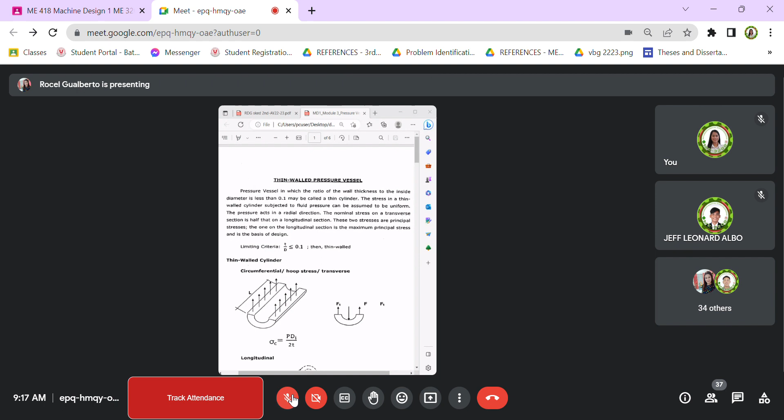Okay, so we have here the pressure vessel. The design of pressure vessel is dependent on what we call thin walled or thick walled. Okay na ba?

So, pag dinidesign po natin siya, we have to identify first whether the pressure vessel is thin-walled or thick-walled. To do that, we have what we call limiting criteria. The limiting criteria is the ratio between the thickness and the inside diameter. Again, take note that this is the inside diameter. So, T over D sub I. It should be less than or equal to 0.1 to be called a thin-walled vessel. Thin-walled po siya if it satisfies this requirement. Otherwise, if it exceeds 0.1, it is called a thick-walled vessel.

So when we say thin-walled or thick-walled, ano po ba yung difference ng dalawa? When it comes to the stress, the stress in a thin-walled cylinder subjected to a fluid pressure can be assumed to be uniform. Katulad po yung sa illustration natin dito. You have here the inner fiber, which is directly in contact with the pressurized fluid. And ito naman po yung outside surface natin, or outside wall, and ito naman yung inside wall. Kapag po yan ay thin walled, we assume that the stress on the inside wall and the outside are just the same, or they are uniform.

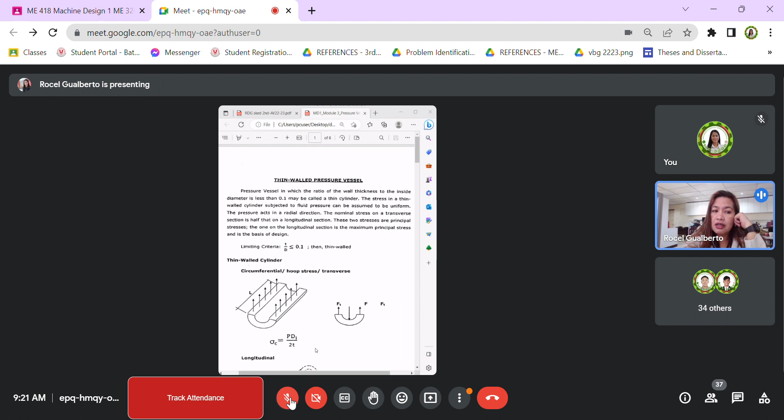So how do we decide for this thickness? If it is thin-walled, we have simply our induced stress. We have the two induced stresses known as the circumferential stress and the longitudinal stress. This is simply derived from force over area equal to the stress.

Okay, so for the circumferential, you come up with PD over 2T, and for the longitudinal, this is PD over 4T. I hope this has been derived to you in your classes in deformable or statics. Okay, so these two, the circumferential and longitudinal stress, these are both induced stresses.

Okay, circumferential stress is when you have here our cylinder and we cut it along its length. So you come up with this cross section of what we cut. Okay, and the stresses on these walls are defined by this equation, PD over 2T. P pertains to the pressure on the inside. We have DI, the inside diameter, and then T is the thickness of the plate to be used.

Whereas longitudinal, that is cut along the circumference of the cylinder. So when we cut it, this is the exposed area. So our stress along this area is measured using the equation PD divided by 4T, and you call it now the longitudinal stress. So, comparing these two, the equation is the same. Only the divisor is different. This is divided by 2 and this one is divided by 4.

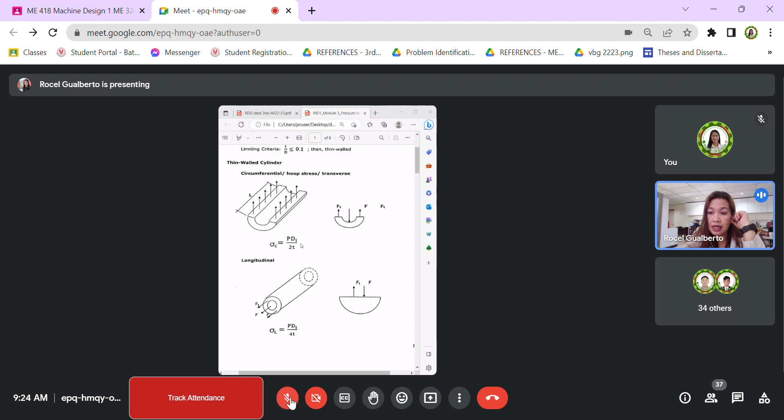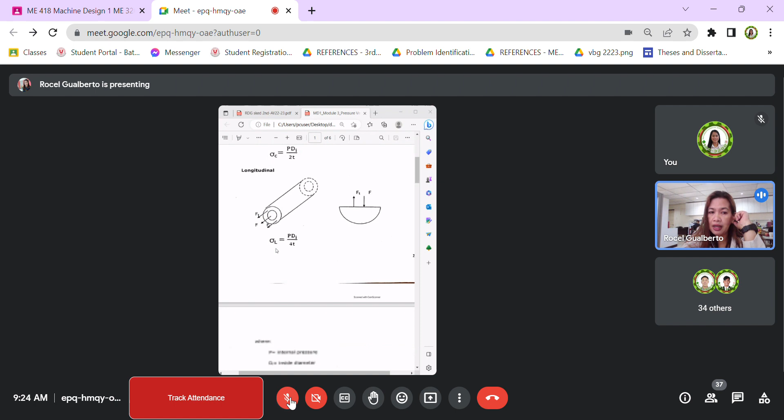So when our cylinder is cut like that, circumferential, PD over 2T. When along the length, PD over 4T. And which is the more critical stress? The bigger stress. So the circumferential is bigger, and this will be the basis of our design. And just like what we usually do, we simply equate the design stress with the induced stress of the material. So, for a good design, we equate sigma D with your circumferential stress. Again, we chose the circumferential stress because it is the bigger of the two induced stresses. So, this sigma sub C would be PD over 2T.

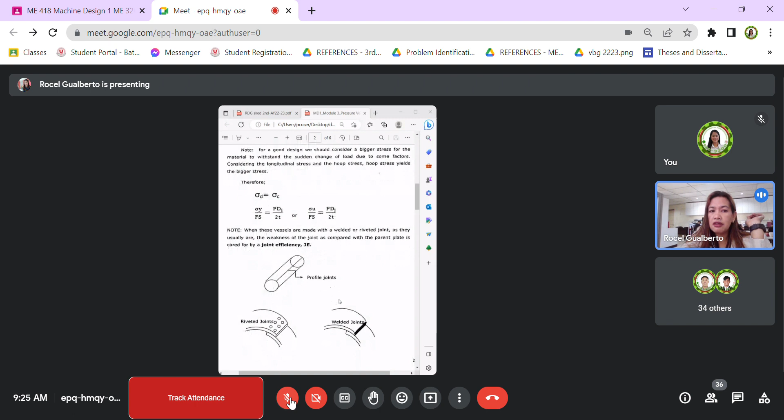Now, there are cases that you are given a joint efficiency. As I said earlier, it comes simply from a sheet of metal that we rolled and then joined. So this is the part where it was joined. So how do we join it? It's either by a rivet or through welding. When you say welding, we have there the filler metal, and we melt it to become a filler to join the two ends.

And the rivet is just like a screw, only it has no thread. So if we remove that rivet, the rivet is totally destroyed. Unlike a screw, where you simply need a screwdriver to detach it again, to disengage it, and then anytime we can attach it again. So, that is the only difference. But its appearance is almost the same. So, you join the ends using a rivet or through welding.

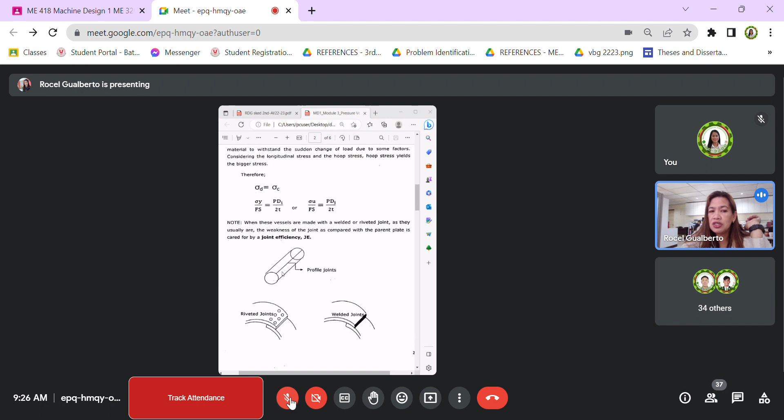So, with these joining methods, sometimes it is not 100% efficient. So the problem gives what we call the joint efficiency. If you are given a joint efficiency, you have to account for that in this equation. We include that efficiency in the equation. So, what do we do when there is a joint efficiency? Then our design stress should be lowered. You make use of a lower design strength to take care of the weakening of the joints. So instead of, as earlier, sigma D equal to your circumferential stress.

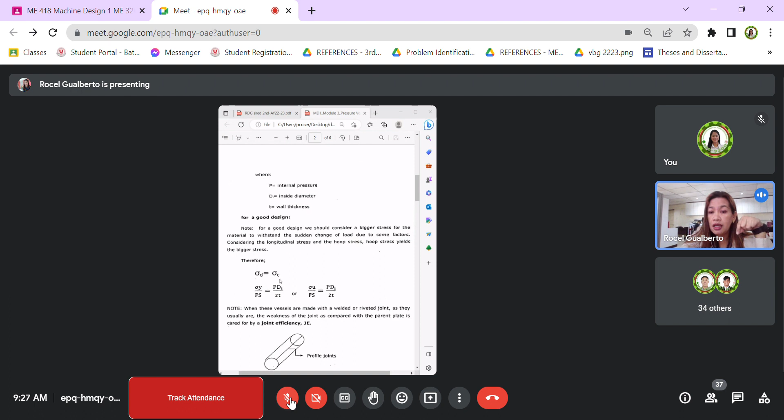We simply equate the design stress to the induced stress. So, dito, ganun din naman. Okay, lamang ang gagamitin natin is the lower design stress. Okay? So, yung lower design stress, yun po yung equate natin to the induced stress, which is the circumferential stress or the bigger stress. Okay?

Now, we lower the design stress again to take care of the weakening of the joints. So, dito po natin isasama yung joint efficiency. So, that would be the design stress and then you multiply that by JE. Halimbawa, if it is 90% efficient, so you use here 0.90. So it's the decimal equivalent. So in that way, you will be lowering your design stress.

So it's the usual design stress, sigma U over Fs or sigma Y over factor of safety. Okay? Ngayon lang, i-multiply po natin siya ng joint efficiency to lower the value. Okay? So, at ito po yung lower design stress, siya po yung equate natin to the induced stress, which is the circumferential stress, PD divided by 2t. Okay? So, from there, you can compute now for the corresponding thickness of the plate to be used.

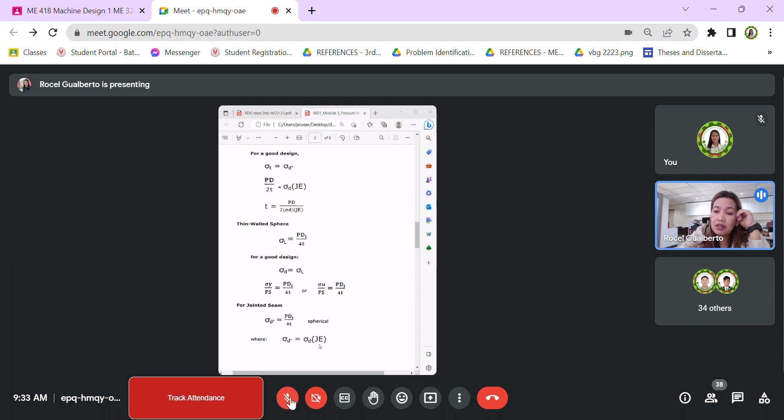Okay, question? Hello?

Okay. So, ganun po natin i-design kapag po ang member natin is thin-walled. Again, yung po procedure na minention ko, yun po ay para lang sa thin-walled. Either po siya ay cylindrical o kaya po ay spherical. So, sa induced stresses, pag siya po ay cylindrical, PD divided by 2T. Kapag po naman siya spherical, it should be PD divided by 4T. To be equated to your design stress, sigma D.

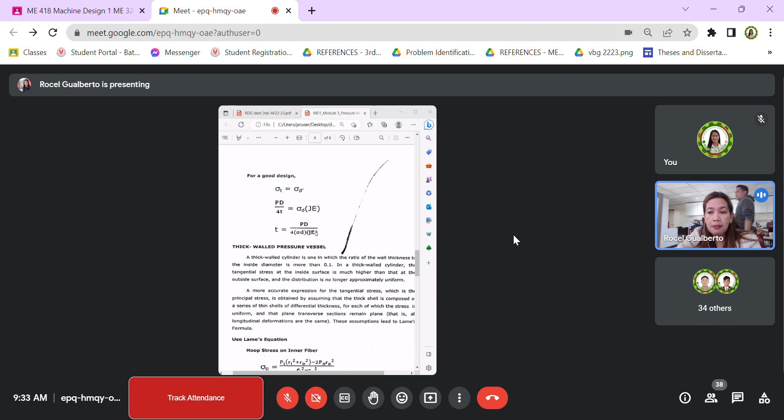And if there is a joint efficiency given, instead of sigma D, you use sigma D prime, the lower design stress. So, that would be our procedure para po doon sa unang klase, the thin wall. What about naman po if we see a thick wall vessel? When we say thick wall cylinder, the ratio of thickness over inside diameter is more than 0.1. And pag sinabi natin na thick wall, yung stress doon sa inner walls at doon sa outer walls, malaki yung difference. Higher po yung value doon sa in contact with the pressurized fluid, so it's on the inner walls.

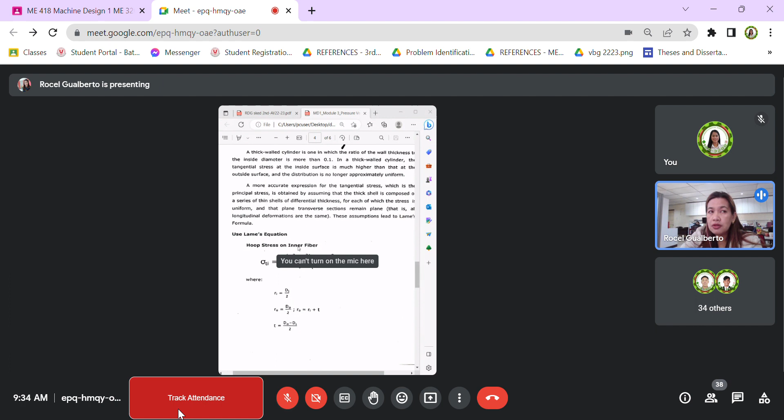Now, kapag po nakita natin na siya ay thick wall, we can no longer use po yung mga equations kanina. Instead, we will be using what we call Lame's formula or Lame's equation. The Lame's equation po is derived galing din sa thin wall. So, thick wall po siya, dinivide mo po siya ng maraming thin wall, and then you come up with this equation. So, if known to be a thick-walled cylinder, you will be using in your design the Lame's formula. We have here listed the three Lame's equations.

First is the hoop stress on the inner fiber, sigma T sub I. And then here naman po is the outside wall, the hoop stress on the outer fiber. And the last one is the longitudinal stress. Paki-correct lang po nito. There should be sigma and then subscript L. Yung una is sigma T sub I and this one is sigma T sub O, so correct po yun. Ang i-correct lang natin is sigma L.

Now, we look at each equation. Halimbawa po ito muna, hoop stress on inner fiber. What's in the equation? Pi is the inside pressure. The pressurized fluid inside, we assume it would be the same po doon sa wall. Ri is the inside radius; given the diameter, I simply divide that by 2 to obtain the radius. R sub O is the outside radius. And then you have Po, the outside pressure.

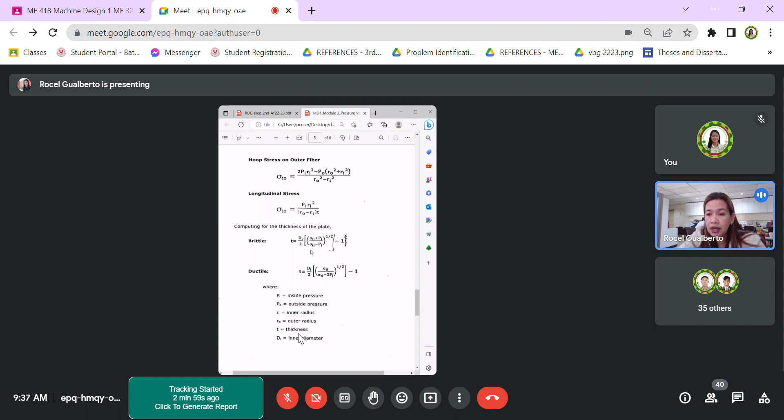Hello? Okay, now, dito, yung Lame's equation po yung gagamitin. Again, this is valid only for thick wall. And when we design, ano po ang ating i-design? We are looking for the dimension. Kapag pressure vessel, katulad po ng sinabi ko kanina, it is the thickness of the plate na ginamit mo, yun po yung ating hahanapin. So, what would be the thickness?

You see here two equations po for the thickness: one for a brittle material, and the other one for a ductile material. This is along with the Lame's equation. Pipili lang po with the given material kung aling equation yung gagamitin. And the equation involves Di, the inside diameter, which is usually given, sigma T sub I, and then Pi.

So, Pi is usually given, okay? That's the inside pressure. And yung sigma t sub i. So, ibig sabihin, before you can solve here for the thickness, necessary that you solve first for sigma t sub i. Okay, so, need muna po natin i-solve yung sigma t sub i. And where can you obtain the value of the sigma t sub i? Saan po natin makukuha yung equation? Ito po yung sigma t sub i. So meaning, you need to solve this first. Tsaka po natin isa-substitute dito sa equation. Okay? So, ano yung sigma t sub i?

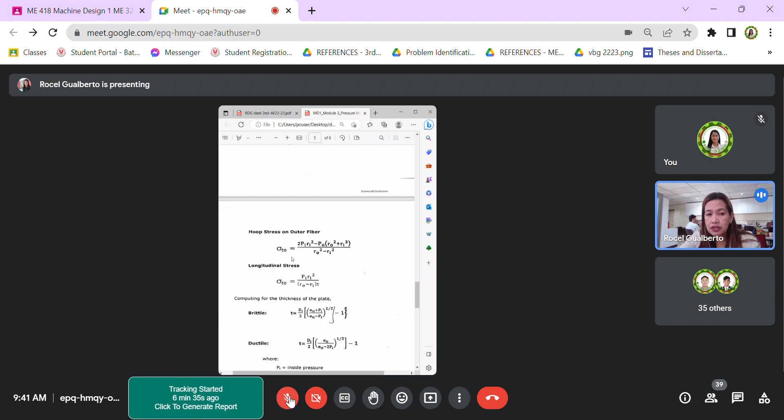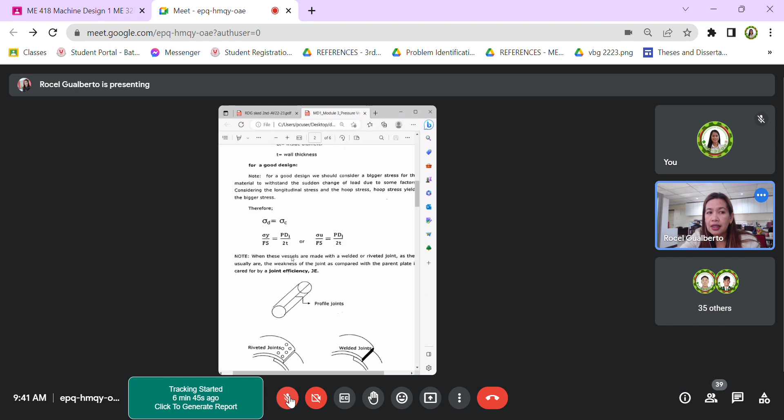Okay, good. So, again, you would start with your limiting criteria for you to solve a problem on pressure vessel. Ano muna po ang uunahin lagi natin? t over D sub i. Ayan, the limiting criteria. Pag na-solve mo po yan, you would know if it is thin-walled or thick-walled. And once you know na po kung thin-walled or thick-walled yan, meron na po na procedure na ipo-follow sa pag-design.

But then, you look at the limiting criteria once again. This is t divided by D sub i. So, it is a function of the thickness also. Para bang yung sa atin na sa compression. The slenderness ratio is a function also of the dimension. So, ito po, ganun din. Yung limiting criteria po natin, it's a function of the unknown. So, initially, hindi mo pa masosolve itong limiting criteria natin, kasi unknown po yung thickness. So, ano pong gagawin natin kapag ganoon?

Hello? Hello? Ano pong gagawin natin kapag ganoon? So, sabi natin, we need to start with the limiting criteria. But then, yung thickness is still unknown. Anong gagawin doon? Hello? Narinig po? Rinig po. So, anong gagawin natin kapag ganun?

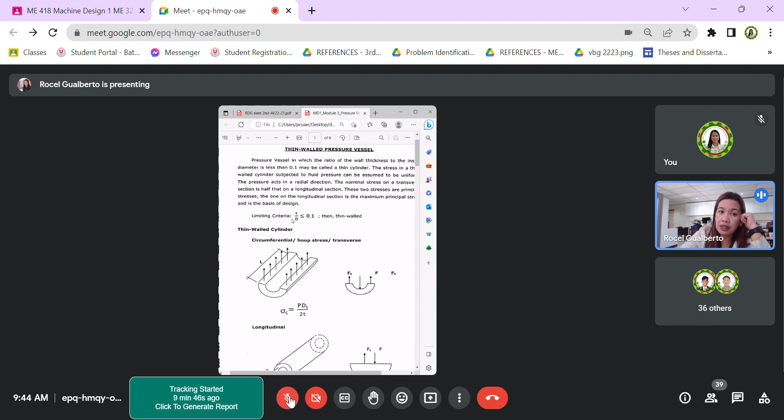So, kung nag-follow po siya doon sa requirement, ibig sabihin, it is really thin wall, so yung nakuha nating dimension ay tama. Pero kung hindi po, nag-exceed po dito sa ating limiting criteria, ano ang ating isusunod na gagawin? You need to recompute using equations po para sa thick wall. At kung ano po yung ma-recompute natin, that would be the final answer na. So, ganun po natin i-design yung mga vessels. So, you have here sample problems 1 and 2. I want you to work on this problem.

Okay? So I want you to solve this po. I'll send a link po for the Jamboard para you can paste po your solution doon. Okay? So I'll guide you first with kung paano nyo po isi-solve yung problems.

The first one, determine the bursting steam pressure of a steel shell with a diameter of 10 inches and made of 1/4 inch thick steel plate. The joint efficiency is at 70% and the tensile strength is 60 ksi. So 60 ksi is your sigma U. This is your JE, the joint efficiency. This is the thickness, 1/4 of an inch.

And then this diameter is the inside diameter. Okay, so here you can compute first for the limiting criteria since thickness and inside diameter is given. So from there you will know kung anong i-apply po natin na equation, whether it's thick wall or thin wall. This is a steel shell, meaning this would be a cylindrical vessel.

You need to include also the limiting criteria, T over D sub I.